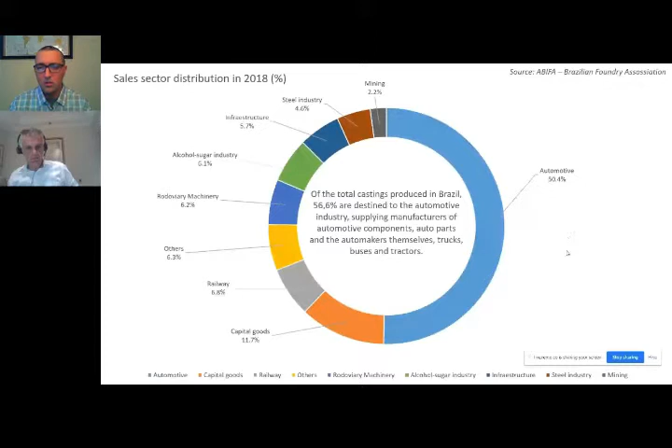Yep. Yeah, and we've seen all of those with additive manufacturing here in the U.S. and obviously around the world. So, talk a little bit about the maturity of additive manufacturing in Brazil, where you feel it falls, and what do you see in the near future, given what you just mentioned in your introduction.

So I think, from my perspective and looking at the Brazil and South America scenario, we're still a little bit in this early majority for adoption of the technology, because, talking about automotive as a good example, our industry here is not really developing new products. It comes from abroad, from the OEM headquarters, almost already developed, and then we just need to produce the casting parts for the automotive industry. We have almost all the OEMs in Brazil right now.

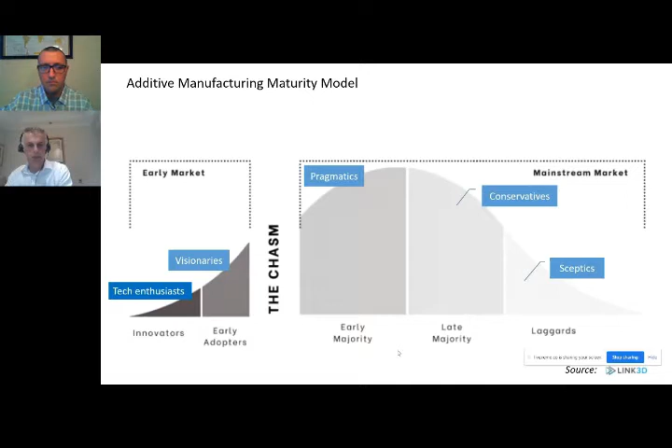Almost for prototypes in the beginning. Yeah, sure. But we also have some customers that need it for production already. So, but almost for prototyping, because they don't have enough volume themselves to have their own machine. For service, for sure, it will be very good for them. So working additive manufacturing as a service business, this is the concept behind our idea.

Okay. And based on the chart that you sent over, it looks like one of the biggest drivers is to get that reduced time to market. Is that correct? Yeah, what are you seeing?

Yes, this is a very good one. I received it from Vogel Communications. It was a survey with more than 500 people from different industries and different levels, so engineers, people from the production area.

More than 500 people responded to the survey. So reduced time to market is still one of the main reasons for adoption of the technology, and optimization of product features, reducing weight, topology optimization, some changes to the design—that becomes also a second preference. So it's a multiple choice survey.

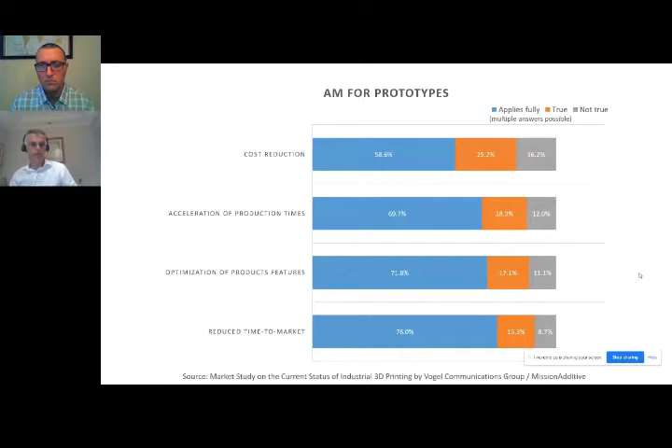So that's why we are insisting on this idea to have the service center here in Brazil, to supply those foundries with prototyping or even production for small series or single parts. Just a few of the big foundries that have a worldwide presence, like Tupy, Steel, Romi, and other ones like that.

They're experimenting with the technology. Would you say most of the introduction of 3D sand printing has come from the United States? United States, Germany, and other service providers around the world, like Thailand, sometimes from China. But basically, they are trying to have the first contact with the technology, importing the services from abroad.

Okay, no, it's really good. As some people on the call know, Humtown, this is a photo of our current 3D sand printing facility. We started a couple years ago with just one printer, through a grant with the local Youngstown State University, America Makes, during 7 years ago, with Jerry Thiel and the team out at the University of Northern Iowa.

So it's really interesting, Ricardo, to hear that your story is very similar to what we've seen in the United States. Places start with one printer, and then based on some prototyping or some new product introduction, they will use 3D sand printing, and then next thing you know, we're moving right along into full-on production jobs. It's really exciting to hear that you've had the introduction through companies like ours, and from others around the world, China and Germany, and that you're embracing that technology and you're ready to take that next step.

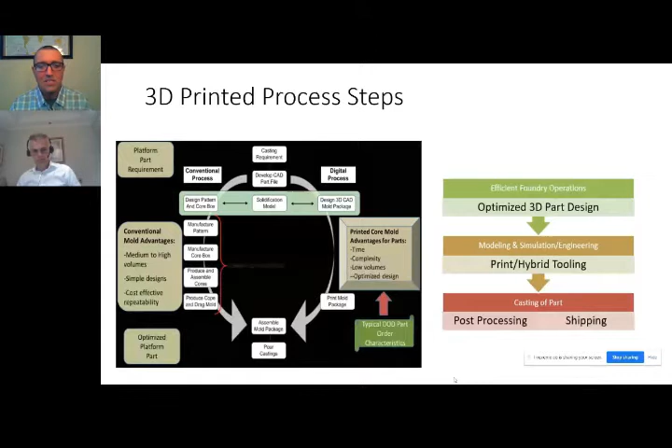Well, and if you can reduce the steps, print a 3D printed core, of a package or multiple, that's what we really like to see: design validation. Because maybe you want to adjust your gating, your shrink rate if it's a very large part, and that's what we've seen a lot here in the U.S. We'll print a complete mold package, pour that casting, verify the dimensions, and we can do multiple iterations if needed. Then, after you've done that, which only takes a few weeks, you can go to your hard cut tooling.

That's a huge benefit of this technology: if you have lag time from getting tooling, and in a worst case scenario, the tooling comes in wrong, then you have to send it back out and make all the adjustments. So we see a huge opportunity for almost every casting to be 3D printed for design validation, to take dimensions, make sure everything does exactly what you expect, and then go into cut tooling. Especially if you don't have any capacity at the foundry, you don't want to do a lot of back and forth with tooling on and off machines.

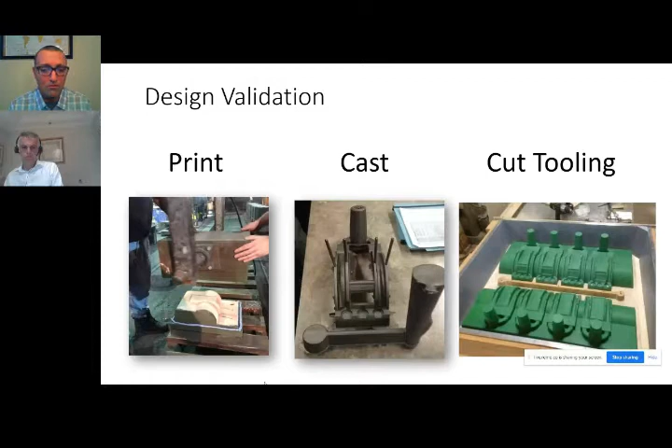You want to be able to cast it and get your parts. Talking about production jobs, this brings up a very interesting point of view. You have a lot of highly complex production jobs in Brazil, and as you mentioned, you're basically at full capacity. So, have you seen the opportunity for all the cores like I have on the screen here?

This was 7 or 8 different cores that were blown and assembled, where we were able to just print one solid monolithic core and still use all the production equipment and molding lines at the foundry, but just place the core. You seen any applications similar to this in Brazil? Yeah, sure. Yes, a lot of them.

It's as I told you before, to teach the customer also to explore the benefits of the technology. It's not just to replace the process. You need to think about how you can design and develop your product, think in which way you use to produce them. So through additive manufacturing, applying the concepts of design for additive manufacturing, focusing on reducing weight and improving quality, topology optimization, generative design.

So exploring these features of the technology, you can reach and apply things like that to improve your quality and product life cycle, anything else. Yeah. Right, and you actually can reduce assembly and glue and stacking, and in your core room, you can actually open up some capacity. And I understand, you have to start doing the 3D printing services to get that introduced,

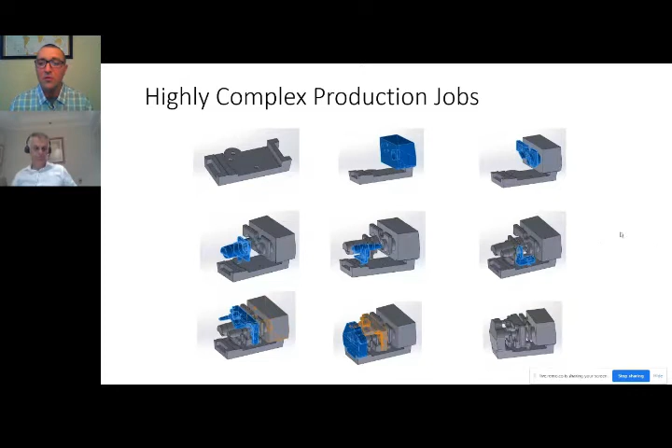but then after it's introduced and it works, that's when you're going to start seeing more printers actually being placed in the foundries. That's what we've seen. Yes. When you can take all this core making and all this assembly time on the bench with gauge and glue, and on the right you have a single sand core. It increases the accuracy. Just so many benefits.

But I agree. If you don't have the ability to do these tests and trials at a cost or a price point that's reasonable, it's a huge barrier, because you never have an opportunity to try this in your factory. Yeah, I think to build a cost model and during your process to understand the ROI for your AM project, it's important that you consider all these steps and benefits from the technology, right?

Yep. Good. So how could we work together until you have your service center running and you have sand printers available? We need to start thinking, how can we help the market by consolidating shipments? If there's foundries that want to try 3D printing, can we consolidate all of those into a container and then ship the container to multiple foundries? I think that's a really good opportunity for us to work together and to help get this technology into the market.

Sure, I think this is a very, very good way. Try to consolidate shipments, so bring more customers together to explore your services in Humtown. I know you have good experience in quality. Some customers here in Brazil received cores printed in Humtown with very, very smooth surface finishing, very good sand quality. This is another issue that we are developing in Brazil, trying to find a very good sand to be used on the machine.

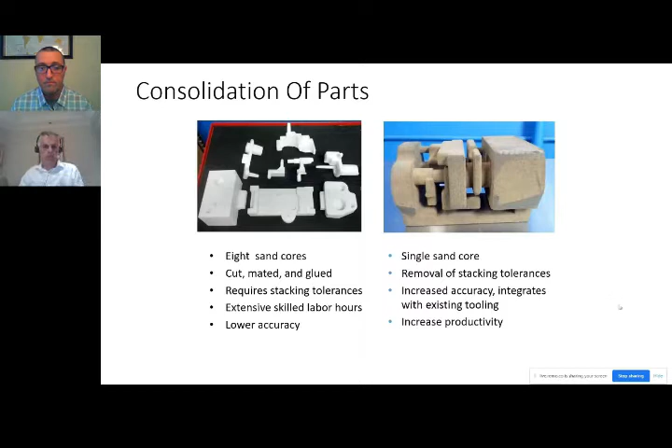Yeah, it's a good point, because the sand in Brazil is much cheaper. So compared with the price of the sand in dollars in the United States or even in Europe, it becomes pretty expensive to import the sand. So the cost per core, for prototyping, maybe could be okay in some cases. Yeah, for production you're definitely going to have to look at that.

When 3D sand printing came out in the United States, the sand was a special screen. It was very expensive, but we worked as a community, working with universities like University of Iowa, and with sand suppliers and resin suppliers. And we do realize we have to keep driving those costs down because the castings are very competitive, and it's not a large margin industry. So we have to be sensitive to that.

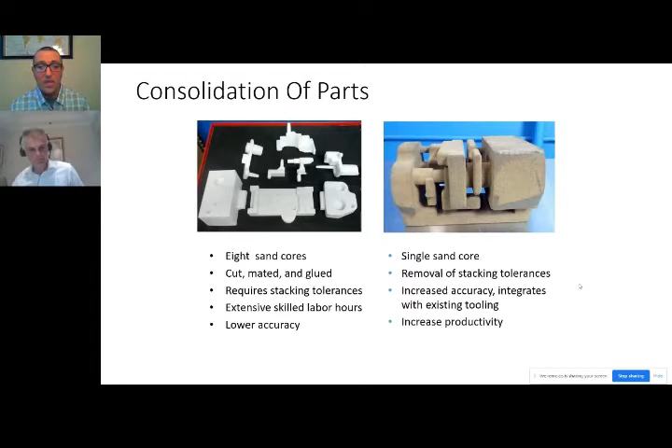And I agree. I understand that would be a hurdle in Brazil as well as the United States. Yeah, sure. Obviously, the cost is one thing, we've got to have the benefits from the market. And we talked about that with your survey, that was a very big driver for your technology.

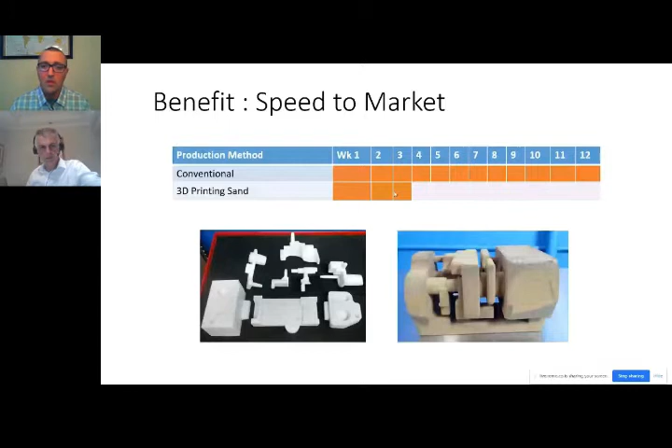Just a couple other pictures while we're finishing up talking here. Obviously, you don't have to use additive manufacturing. It's not all or nothing. You can use a hybrid approach, and I think you'll see that as you're developing out your market in Brazil, you don't have to have all or nothing. You can use just one 3D printed core if you have a design change, sample it before changing tooling.

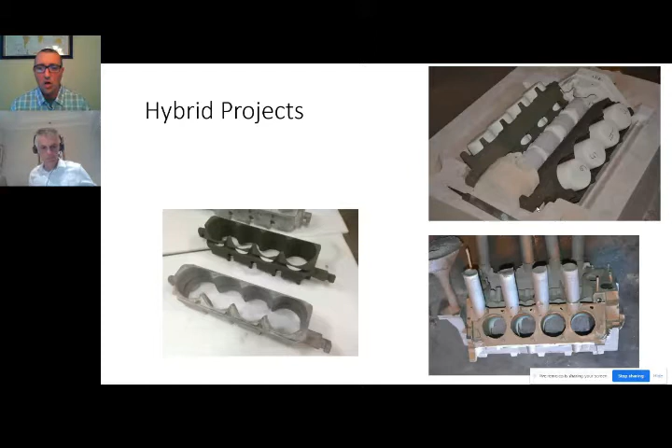But, Ricardo, as we're wrapping up here, what are some ways that you can help integrate this technology? How can our listeners reach out to you? Obviously, if they want to email us, we can put them in contact. But what are some of the things that you can do to help any of the OEMs or people that need to make castings in Brazil, because they're an OEM and there's a high import duty, and working with foundries in Brazil. Maybe explain a little bit about how you can help customers.

Sure. As I told you in the beginning, in my introduction, I have more than 25 years experience working as a foundry supplier, mainly in this area, supplying sand, supplying binders, supplying ceramic filters, coatings. So working together with the people who produce the cores and molds for the casting. So I have good knowledge. It comes from my father, who has more than 40 years working. Now he's retired, but also working in this market for many years.

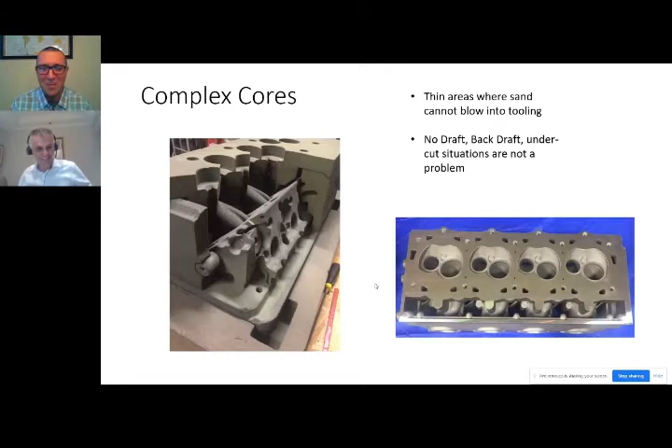You had the opportunity to meet with him. I was going to say, I bet he's still working, even though he's retired. I'm sure he's still working a little bit, helping you and helping other foundry members. Yeah, he's living at the beach right now. Good for him. Yeah, good for him.

So that's where my experience came from, from the experience of my father, working with him, and 25 years working in this market. So I know almost all the foundries here. And of course, if you have customers that need to produce some parts in Brazil, I can help them find the best foundry for different kinds of alloys and process. Also, with some experience using 3D printed cores and molds. And obviously, with that, we can work together and become a total solution, working with you and producing the cores and molds, and then once you get up and running in Brazil, we'll have that to offer.

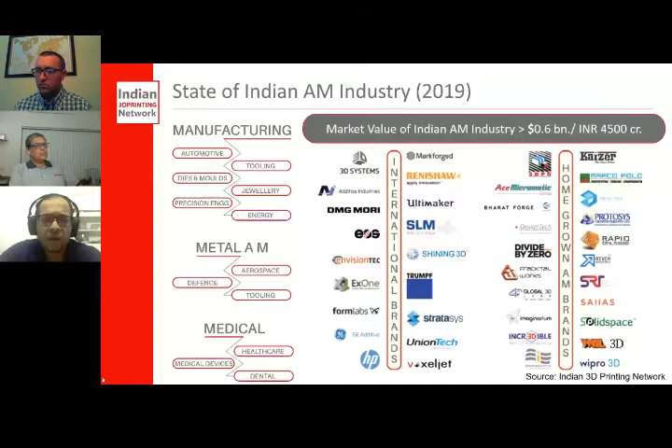With this, I'd like to move on to the next slide, where I'm talking more about the metal AM installed base right now, because that's something interesting in the aerospace, tooling, engineering, automotive, medical, and dental segments. Up to around March 2019, we had about 82 systems across. Most of this is powder bed laser sintering technology. So we have pretty much most of the brands represented in India across the board.

A lot of work is happening in the aerospace tooling side for conformal cooling. Automotive is still more in the infancy stage, and medical, as I mentioned, implants. A lot of dental implants are being printed and exported to the Middle East and other countries. So that's an interesting model which has evolved as well.

So why I wanted to mention this is with this structure, there's a lot of skill already being developed to use a 3D printer, design for a 3D printer, which is very important when we come to something like sand binder jetting, creating a mold, understanding the orientation, the various aspects to ensure that the mold can function as it needs to, and ensuring the quality of the part as well. So that's a brief on the metal side. If we could move to the next slide.

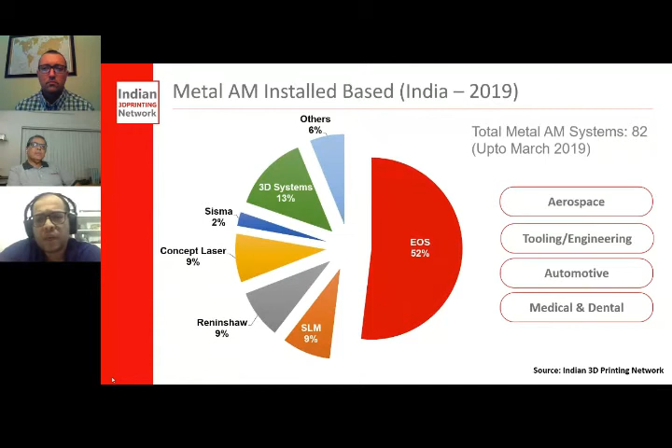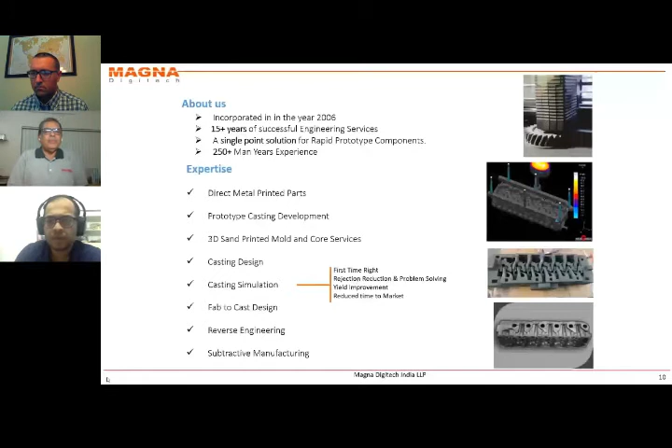The prototyping service we call Prototype Express is for customers who need quick and economically manufactured complex prototypes. The picture you see is a 6-cylinder diesel engine head, which we manufactured right from the solid model to the end product within a matter of 4 weeks.

Most of the time was spent on planning and designing. We printed the sand molds and cores, assembled them, and supplied them to the customer, whose collaboration was with a Japanese company. They really appreciated it, as they did not know India could do this type of development work in such a short time.

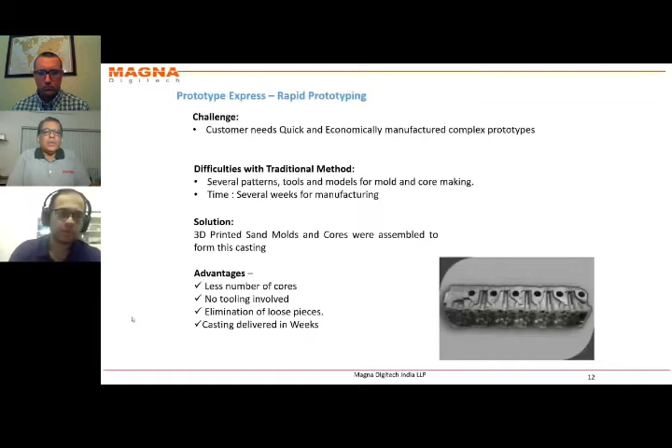The second area where we help our customers is what we call complexity simplified. A typical application would be a hydraulic manifold, where complex profile cores are required. These are very delicate cores and have to be placed without any breakage.

Of course, many foundries around the world specialize in hydraulic components and have that expertise, having 25 years of experience manufacturing hydraulics, so a new foundry couldn't easily enter. But 3D printing broke that belief, because with 3D printing capability, a foundry which was not previously into hydraulic products was able to get into hydraulics. So the large experience of 25 years was neutralized by this technology.

We should of course respect experience and technology, but this allows other people to come in and leverage this technology as well.

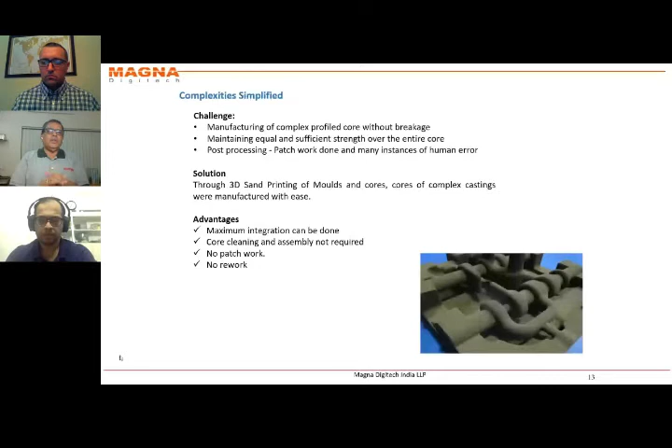These are some of the products which we have printed via binder jet. Our machine is 1.5 meters by 1 meter by 750 mm. Some sample items you're seeing are a printed 6-cylinder part, turbochargers, impellers, and hydraulic components.

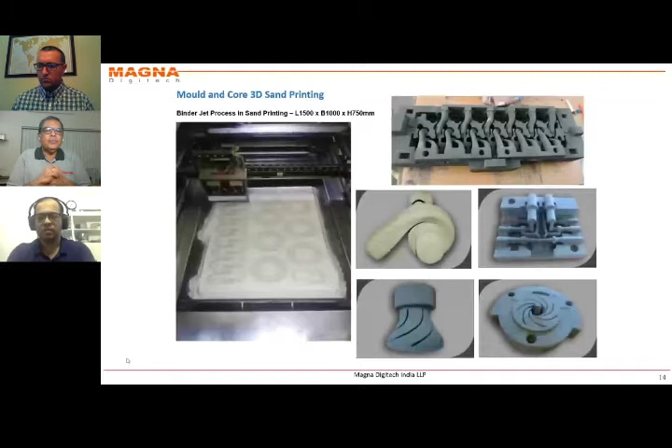In addition to additive manufacturing, we at Magna also do subtractive manufacturing. In other words, we give customers a hybrid solution depending on the situation and products. If the customer wants a very big casting and only needs 1 or 2 pieces, we go via the Furan mold block and we mill the mold.

That is the most cost-effective way, and the cores are done through 3D printing. Another hybrid approach is where the cores are 3D printed and the molds are manufactured in our foundry, either in green sand or Furan. If a customer wants, say, 25 to 30 pieces at a time, that will be the most applicable.

So we have a variety of options to choose from, full-scale 3D printing to additive and subtractive manufacturing for low volume pieces. If it's multiple pieces, 30 to 40 pieces, or like beta testing in the field, we do conventional manufacturing integrated with 3D printing.

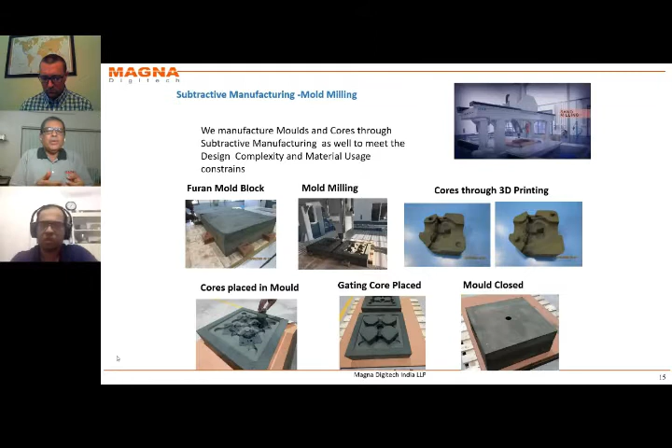From these aspects, to date we started our journey on sand 3D printing in November 2017. In the last 2 years, we have developed around 200 to 220 different products for Indian customers as well as global customers. We even have some customers in the US for whom we do rapid prototyping.

So from there we said, okay, what is the next step for us? We've established ourselves, though there's still a lot for us to learn in sand 3D printing. We were looking at what is the next step. From a foundry background, we always talk in terms of pounds, kilos, or tons. So we said let's look at things a little differently and go look at direct metal printing.

We have chosen to partner with Desktop Metal in the direct printing business, and ours is the first installation in India for direct metal printing.

We are still learning the ropes. The 3D sand printing and castings was very easy because we had 25 years of experience. People knew us, we knew what a casting was, we knew what the issues were, and our design and engineering services really accelerated our business case there.

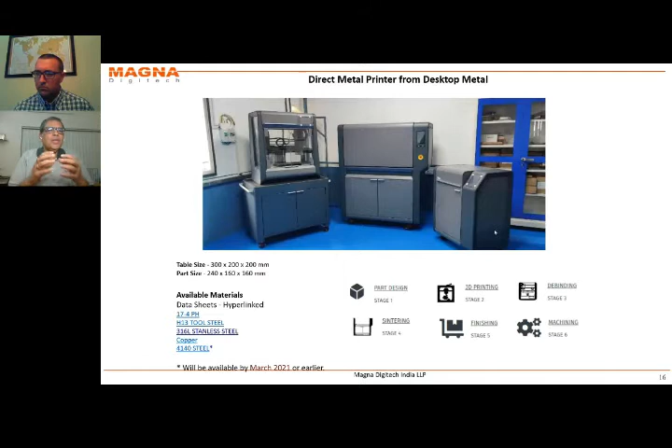The engineering at our customer side, the challenge for them is to design these parts for this. For example, take that helical gear and pinion printed on our binder jetting desktop metal machine - they are not solid products, they have a honeycomb structure inside. Our customers are used to solid products. They're saying, hey, this will not work, why is the weight so low?

When I say customers, this is customers in the traditional earth-based industry, not the aviation guys - the traditional earth-based industry where weight doesn't matter much. So that is some of the challenges we are looking at. Over time we will get over those challenges.

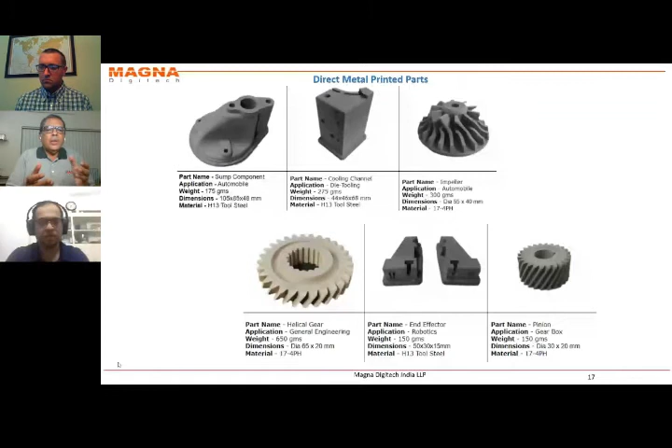So the basic in-house technologies we have are the Furan 3D printing machines. I'd also like to add here, we also provide completely machined, ready-to-assemble products, as well as validation. We have a Romer 6-axis absolute arm scanner, a 5-axis machine, and other bigger machines which we have in-house in our machine shop.

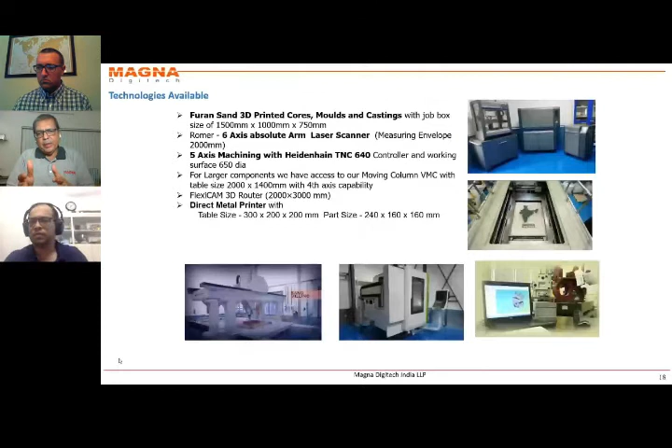These are our facilities. One is the machine shop and direct metal printing, shown on the right-hand side, and on the left-hand side is our sand printing plant. They are located in the city of Coimbatore.

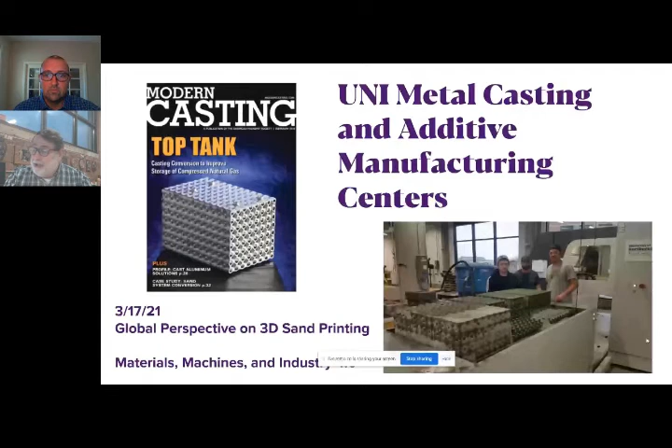Next slide is to advance the metal casting industry with this really fantastic new technology. A little bit about the Metal Casting Center, if you're not familiar with us.

We've been in existence over 30 years. We're one of the longest operating centers of excellence for metal castings at a university in the world. We do product testing services for the foundry's material supply chain, applied research and technology for the foundry industry, and program support for the university's academic program.

Over the last 7 years, we've spent over $2 million on student salaries alone. These students have an opportunity to work up to 4 years part-time at the metal casting and additive manufacturing centers, and are very highly recruited and sought after by the industry. They have the skill sets for a company to adopt manufacturing 4.0 technologies, and that's our major benefit to the industry. We also provide direct support to the operating foundry industry on solving issues in the materials and processing of metal castings.

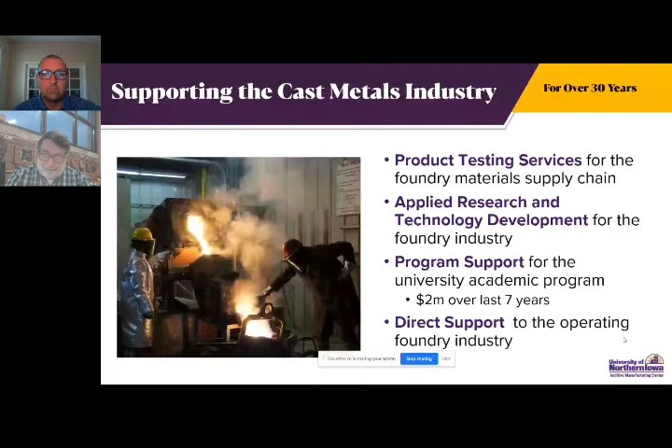So what did we do? We took our experience in industrial research, foundry materials and processes. We knew how to stick sand together very, very well, and we applied it to additive manufacturing. We're very highly involved in the industry associations: the American Foundry Society, Steel Founders' Society of America, Non-Ferrous Founders' Society, and also the Investment Casting Institute. Demonstration projects are our specialty.

We focus on OEMs, and this is important to understand. We focus on OEMs because they're the purchasing power in the supply chain. For them to understand the potential of new technologies, once they understand and start looking at parts being produced, we then move down to the small to medium size supply chain for castings, to provide information and support to adopt and utilize these technologies. We also have defense projects with the Army, the Navy, the Air Force, through the Defense Logistics Agency, and national labs.

So we were the first university to purchase a large industrial sand printer. Everyone asked me, why did you buy this thing? The answer was pretty short: if a company takes a risk to buy a piece of equipment that's $1.5 million and it fails, that's a big deal. We can fail. We can make those mistakes up front.

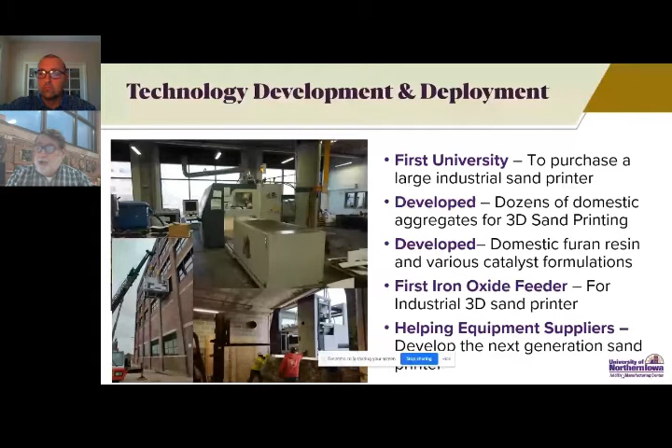So we talk about helping companies develop products for 3D sand printing, or develop the technology itself. What you see here is what we call the alpha printer. We'll talk a little bit about the beta printer, which is a little bigger one. This one is used for research and development of resin systems: furan, phenolics, inorganic binders, and more recently urethane type binders for additive manufacturing, which have much more compatibility than the furan resins that are in majority use today.

Industrial research includes development of multiple domestic 3D printing aggregates. We look at working with new companies, both in natural mineral deposits, whether that's silica, chromite, or zircon, or man-made aggregates such as ceramics and mullites, and also through our industry associations and our staff.

And how do we get this information out to people? Our staff serves on over 8 technical committees through the technical organizations. So we are out in foundries, talking to people, transferring this knowledge.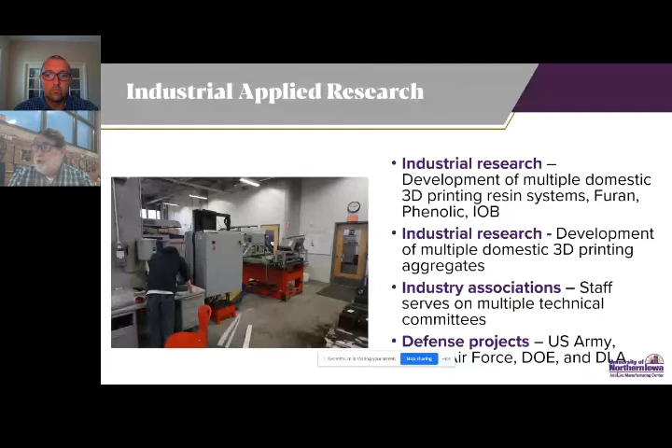Also, I'll put a little plug in for investment casting. As a lot of research and development centers for the foundry industry, we're working into manufacturing 4.0. And we're looking at fully operated, fully automated units that take the requirement of the manual labor out of the production process. And this does two things. It has a great effect to control costs of producing products, but it also removes the human error. So we can do things the same way

every time. Low-cost sensors: you'll see us publishing information on sensors that give us temperature, moisture, gas chemistry, pressure, shift, or impact. We can either install these sensors for Internet of Things information on equipment or place these inside of molds or cores to give us the exact conditions so we can make better decisions.

All of this Internet of Things and sensors is to provide information to the foundryman to make those good decisions, but also to understand what's happening now, not in a week or so when the castings end up in the clean room. Robotics and automation in casting finishing, and also next-gen sand printing. Next slide.

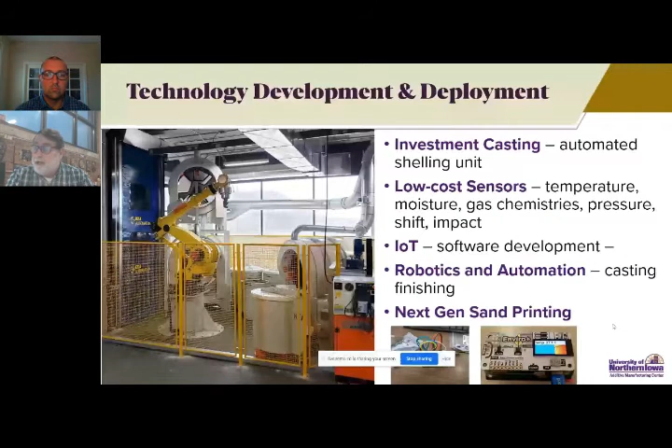So what I want to talk about is what's happening now in research and development in 3D sand printing. And I'll go to domestic quality. So domestic quality for a North American OEM, and in this case, it's Tinker Omega, Springfield, Ohio. This is our beta printer. It's been a long time coming. I get ribbed by a lot of people in the industry. Hey, you got that printer yet? It is a long time coming because the technology advancements that will be made in this equipment are substantial.

Increased speed, and we're talking about printing molds and cores the day you need them. Not for tomorrow, not for the day after. More choices, and the system won't be tied to a specific resin system. So it'd be available to run these new systems that we're working on right now.

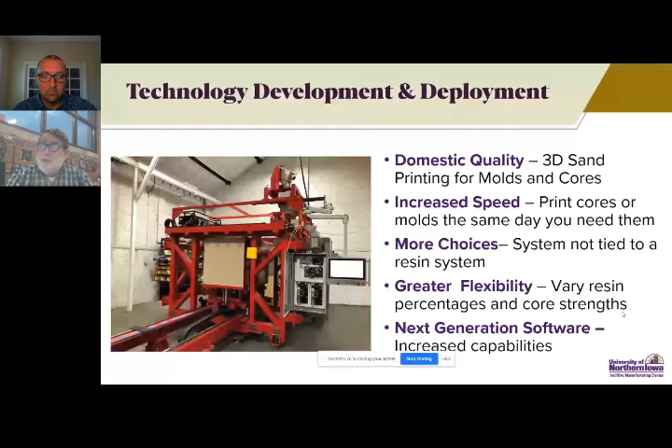Greater flexibility to vary resin percentages within the same job box to give you a selection of core strengths, one for easy shakeout and one for small, lacy, delicate cores. And also the next generation of software with increased capabilities. All this takes time. We're hoping to receive the printer within the next 30 days. Next slide.

So moving into what are we working on again? Manufacturing 4.0 technologies, which have been proven to really advance the foundry industry and suppliers of castings. If there's one thing, and we talked about this before the presentation started, it's the companies that are spending capital and making capital improvements in automation and technology that are viable for the future. The castings that have refused to adopt or did not have the capital to modernize and automate their companies are really sadly falling behind and closing at a very disturbing rate.

We call these manufacturing 4.0 technologies, and additive manufacturing is a big part of that. Not just in sand printing, but also in printing tooling, printing patterns for investment casting. Additive manufacturing is making the time between design conception and realization of that casting incredibly short, where we can have complicated castings within 24 hours. Automation, removing the manual labor, advanced manufacturing processes, process sensors, and the Internet of Things.

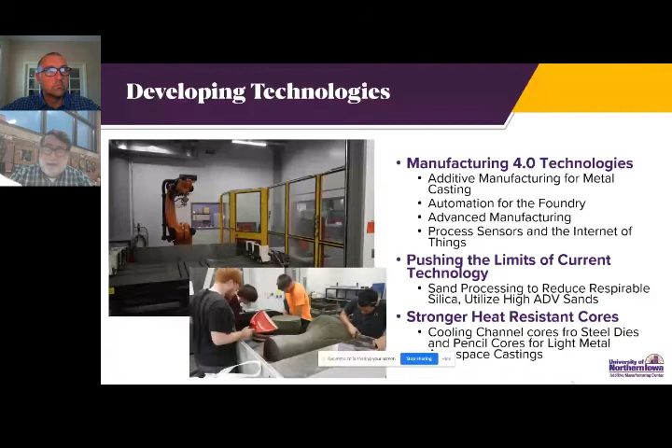So what are we developing technologies for? Hybrid molding, better performance in resin systems, better surface finish through coatings, faster and more flexible printers, better software, process sensors, and increased use of non-silica sands. In this, I wanted to throw this in the end because everybody thinks that all this is very, very simple and easy.

Down in the left-hand corner, you'll see these were some of the first printed cores for aerospace castings. This was for a prototype engine, not flight ready, but on the test stand for SpaceX, their rocket engines. And on the bottom right, you see the result of some of our testing and some of our pushing the technology as far as it will go. And I'll conclude after that.

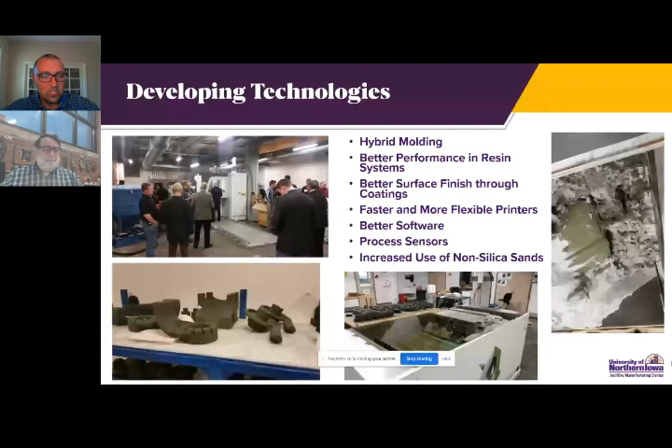My pitch today for the audience is to stimulate conversation at the tables about how we sell the advancement in terms of utilization of additive manufacturing for tooling to the ultimate customers who benefit from what all of you do. And so I hope to pull that thread out and give you my limited perspective. And of course, I'm just a consultant, so I'm not speaking officially for DoD, but these are the things that I've seen lately. So I have 3 slides. We'll get through them real quick, and hopefully there will be a lot of chat.

Brandon, next slide, please.

So I guess I wanted to approach this from a simple SWOT analysis and pick all of your brains on how we communicate our value proposition for tooling. And I need to learn from all of you because every day I learn more from folks like Jerry and Brandon and Kirk and Cynthia and all of you who are actually out there making things happen.

And it's interesting that Ford Motor Company, and maybe we have the guy who made it all happen at Ford on today, and who responded to an invitation on LinkedIn for me and helped guide me on how to do an America Makes project. Or maybe we have somebody out of Keyport who also had an S15 in the 90s and had the early arrival of ExOne technologies to do in-house stuff for DoD. Now we have Rock Island Army Arsenal with an ExOne asset. We have Tinker Air Force Base and the REACT team with an ExOne asset.

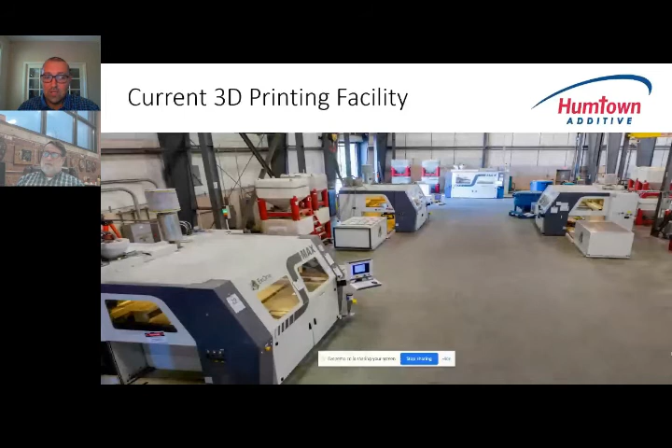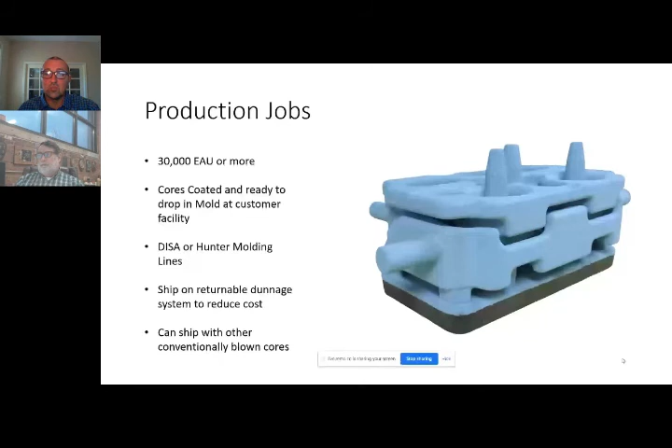Maybe more, as Jerry continues to work on the latest and greatest printers and technology. But that's where we're really going as a company. We were honored to become one of the National Association of Manufacturers' Manufacturers of the Year, in an industry that's been so set for so long. It goes back to thousands of years of pouring metal into sand, but to innovate. Like I said, it's the team and all the people, our clients, our customers that work with us to get us to that point.

So I just wanted to touch base back with the team. Thank you everyone for joining and listening here today. Now we're going to open up for some Q&A so we can really deep dive into what we're doing as a group collectively to keep advancing this industry. We're not done yet. We're just getting started.